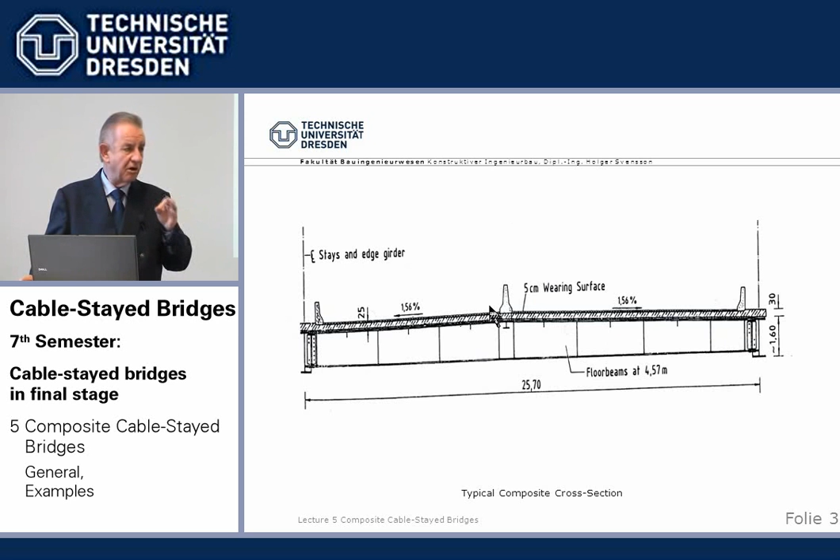It's also clear that it is unreasonable to use a central cable plane for an orthotropic deck, as we had with steel, for example, or all-concrete decks. Sometimes it may be advantageous, but in this case we have negative bending moments as two cantilevers, which gives high tension in the roadway slab. That's basically wrong - we never use one central cable plane with orthotropic decks, only two outer cable planes.

We look into the overall beam. A very efficient cross-section is a steel girder grid with main girders at the outside and cross girders in between. We connect the stay cables directly to the main or longitudinal girders - that's where the force has to go, the shear has to go into the webs. Don't try to anchor it elsewhere and then have to transfer it again; direct transfer of forces. Then we cover the steel girder grid with a concrete roadway slab that can either be cast in place or precast.

Now, precast slabs, as I've outlined here, which will be placed here, have the advantage that when they are being installed, they have an age of maybe one year. They are cast on site before. That means they have strongly reduced shrinkage and creep characteristics, which is advantageous, and it can mean fast or rapid progress on site.

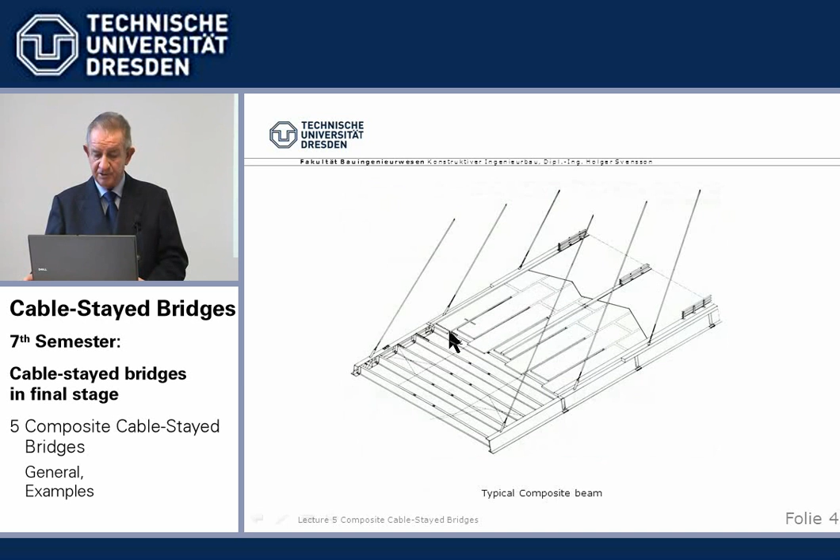Their shortcoming is that, of course, we do have joints. We place the slabs here, then we have longitudinal joints, transverse joints, and in addition, we have to place shear studs on top of the cross girders to get the rigid connection between the steel grid and the concrete slab. So these shear studs protrude into pockets, which we have here, and all this has to be closed by cast-in-place concrete with overlapping reinforcement in the joints.

Such joints are always, in general, weak spots in a roadway slab. We'd rather try to avoid them. However, here we can do it because the joints are longitudinally and transversely permanently under compression, contrary to other structures. So it can be very advantageous to use precast slabs.

The other possibility, of course, is to use cast-in-place deck. We will see examples for that as well. There we have the disadvantage that we have to install forms, shuttering between the cross girders, cast in place, and it takes longer and has more shrinkage and creep. So it's a trade-off.

Both methods, precast or cast in place, are possible. They have their pros and cons. Normally the contractor decides what, for him, with his equipment and his experience, is the most economical.

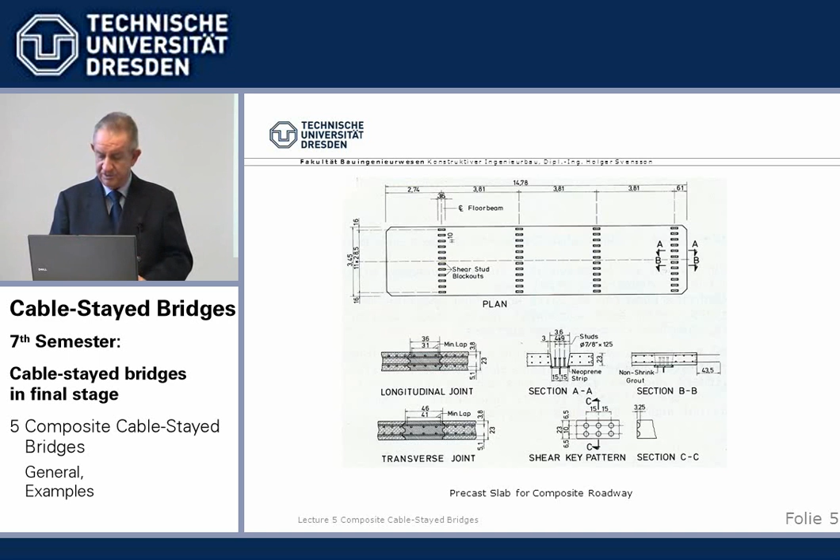Just to make it complete, there are additional composite features in addition to the roadway slab in concrete and steel girder grid. There are examples where we have a concrete beam with steel cross girders in between. This was used for weight purposes. We needed to bring the weight down for the East Huntington Bridge. We'll show that example later. So that's a partial composite solution.

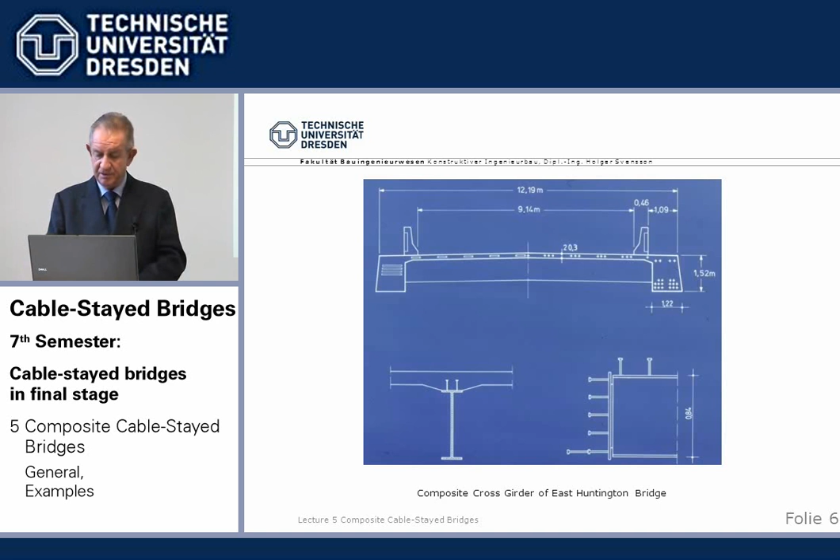And in addition, we can use a composite solution for stiffening orthotropic decks. It's called, today, there's a development in Germany also, and we call it orthocomposite. Now there are two advantages. First of all, asphaltic concrete sometimes doesn't stick so well to the steel—there's delamination, and you have to repair it all the time. Now here, if we put a concrete layer on, we can use some shear studs and get a really good connection.

Furthermore, on an orthotropic deck, when the temperature drops, slippery ice forms earlier, faster than on a concrete deck, which takes longer to cool down when the temperature goes down. In addition, we can use the concrete to stiffen the orthotropic deck itself, which means we may be able to increase the distance, normally 300 millimeters, to say 400 millimeters, as was done for the Zárate-Brazo Largo bridges. And instead of using a 12 or 14 millimeter thick top steel plate, we may reduce that to maybe 10 millimeters.

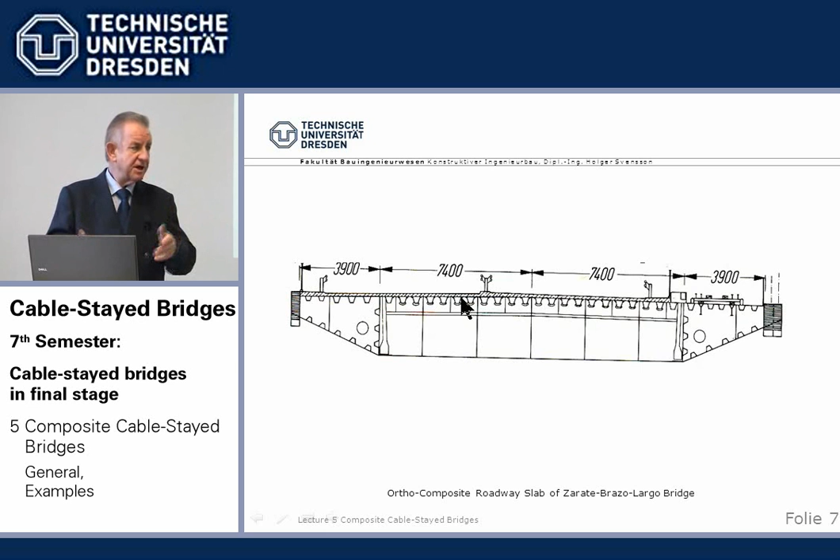Now, when we have these three types of cable-stayed bridge beams—steel, concrete, composite—when do we use what? Meaning, where is the economical range for these different types? Many years ago I made this curve with an engineer of mine, and we tried to fiddle around with unit prices. It can only give an indication, but very generally, lower spans up to something like 400 meters are very often economical in concrete. Medium spans, 400 to 600, 700 meters, may often be economical as a composite beam. And long spans, say above 700 meters, are still the domain of steel.

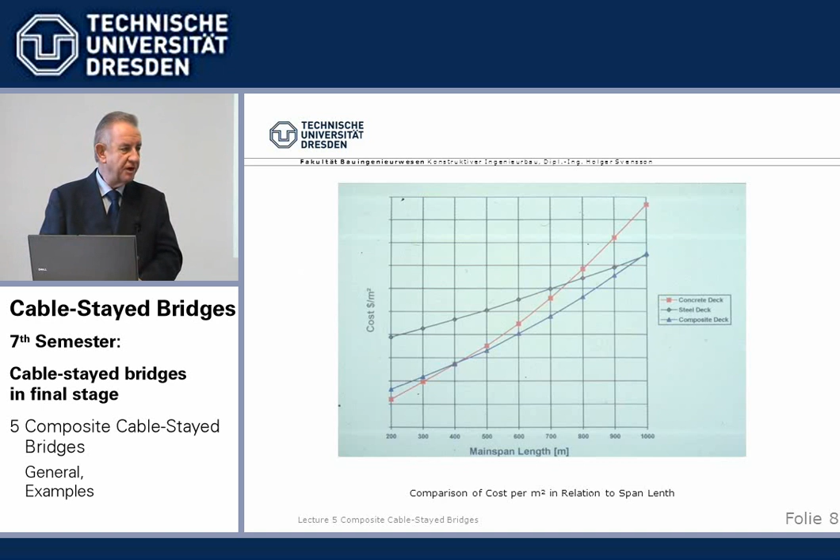One cannot really say that's always the case—it depends on the country. Norway builds concrete with 530 meter long spans because it's a concrete country. In the US, steel composite will start much earlier. But roughly speaking: up to 400 meters concrete, 400 to 700 meters composite, and above that, steel—very general. That's what you can read out of this simple curve.

Now, having discussed the basics and the basic idea of composite, we now show examples.

Just as we mentioned spans, where do we stay? It started with a very small bridge, just for curiosity, because the bridge was in Germany. But then, in earnest, we started around 1970 with something like 450 meters. And the world record still is 602, Yangpu. So what I told you, above 400 to 700 shows in the record spans.

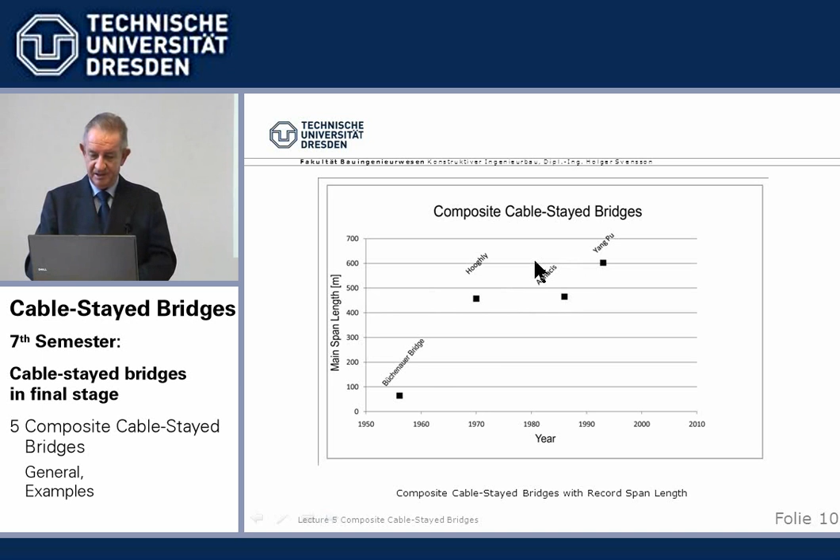The very first one, normally overlooked, a small bridge near Karlsruhe, Büchenau, across the railway, completed already in 1956. Very ingenious. They had the beam built too high against the final state, installed the cable slack, and lowered the beam down to a predetermined level, and by that lowering down they stressed the cables. And it worked. Homberg was the checking engineer and was the idea behind it, but that was more or less forgotten. It was a unique bridge.

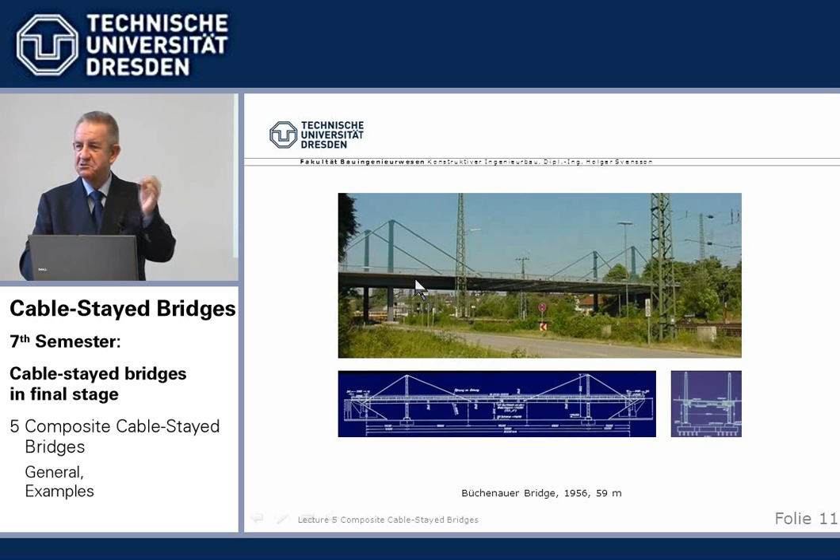People didn't take it up until the early 70s in India, in Calcutta, where a second bridge had to be built across the Hooghly, a tributary of the Ganges River. There's one Hooghly river bridge, a steel truss from Freeman Fox, built before 1900, and that's overloaded. A next bridge was required, and there was a long engineer selection process until finally my company, in the late 60s, before my time, got the job.

And finally what came out was a world record during the design stage, a 457 meter main span bridge, 1,500 feet. Of course, at that time it was all in feet and inches, so the span was 1,500 feet. We can remember that very well. And if we translate that, it's 457 meters.

The design condition was to use only local material in India and labor intensive methods, because we wanted to employ our Indian workers as much as possible. So, use Indian steel — at that time Rourkela was the steelworks in India, and the steel they produced was not weldable. So, no orthotropic deck, which was unusual at that time. What could you do? You use a concrete deck.

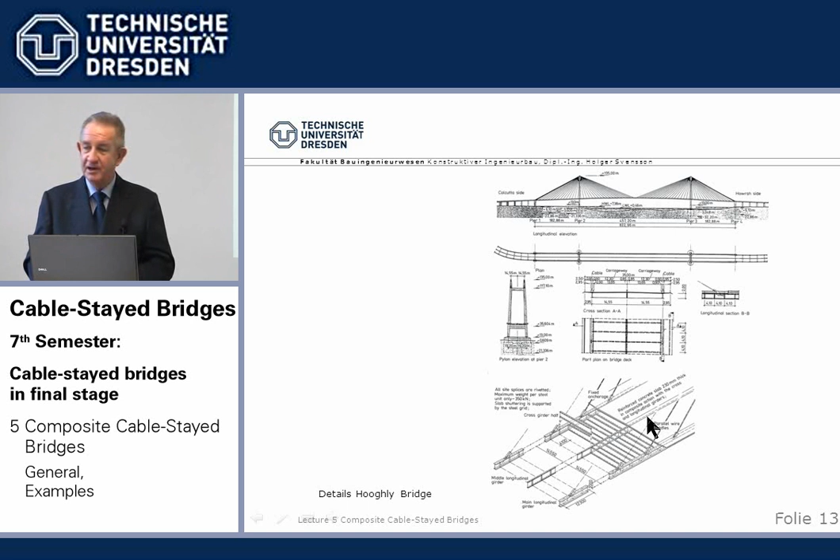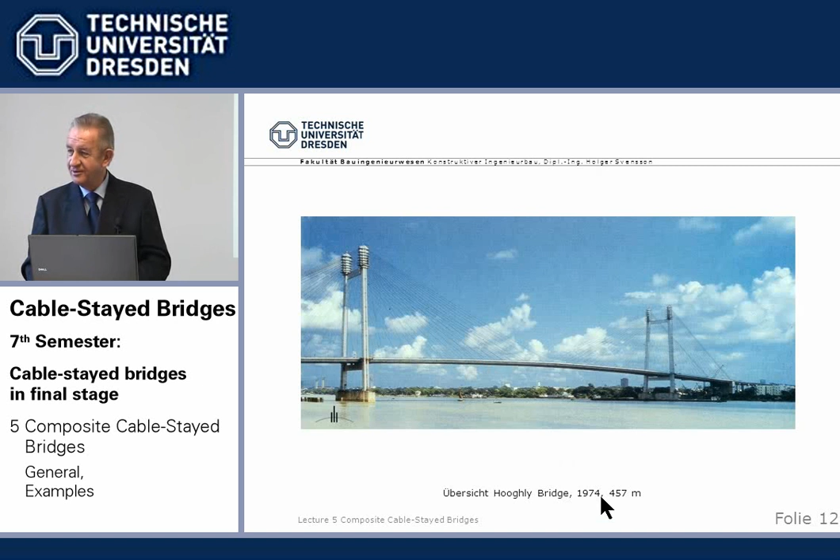Professor Jörg Schlaich, you may have heard of him, was in charge. At that time he was still a partner in my company, Leonhardt, Andrä and Partners, when I started there in the early 70s. I was for some time nominated as resident engineer in India, but then I had to go to the US, and my wife wasn't so unhappy about that — we had a newborn child, and she wasn't too keen to go to Calcutta with a newborn child. Anyway, his able assistant, Rudolf Bergermann, supervising engineer at that time — they were the two who designed the bridge.

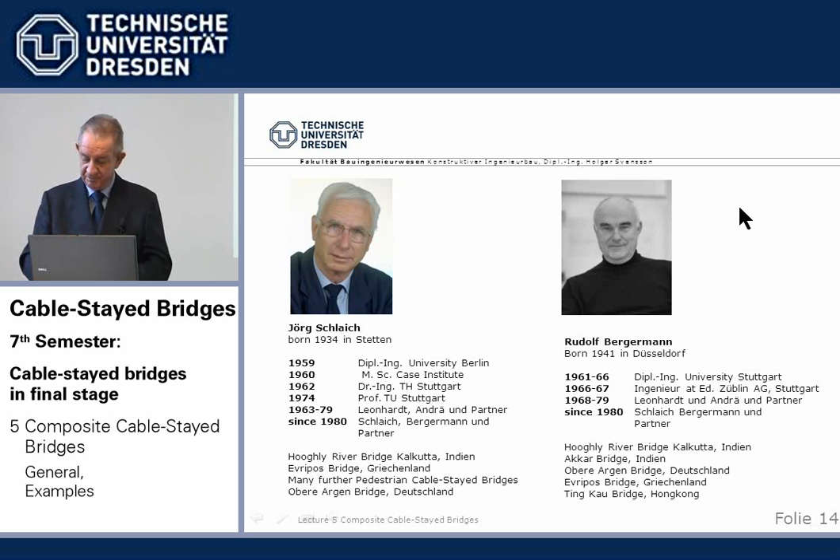I think in 1980, the Sunshine Skyway Bridge in Tampa, Florida, was hit by a ship, fell into the water, 35 people dead. So it was required very quickly to build a new bridge. We will see that in ship collision.

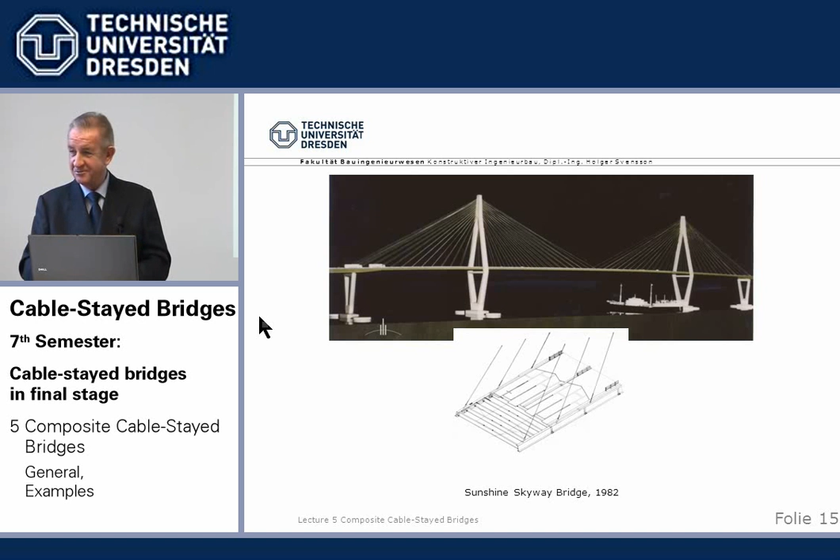I'll show a picture. We designed this as a fairly new design along some lines of the Hooghly bridge, and some new ones. But we lost it in the US, in competition against Jean Muller, with another concrete cable-stayed bridge, because — I keep saying — of some bad foundation design in the approaches, which we didn't do. It was a very nice design, and it still hurts that I spent two years in the US and we were not successful.

The next bridge which took up these design ideas we had developed for the Sunshine Skyway Bridge — just briefly a remark. In Germany at that time, the codes required a limitation of tensile stresses in the concrete roadway slab under service load. That would have meant post-tensioning the concrete roadway slab in Germany, which is uneconomic, as I told you before. And that's why there were no composite cable-stayed bridges in Germany until recently. But in the US, we said, what the hell.

The American codes didn't know about these finer points we were considering here. So we said, okay, we use a lot of finely spaced reinforcement for crack control and have safety in the ultimate state. And so we could design this bridge, which would not have been possible at that time in Germany.

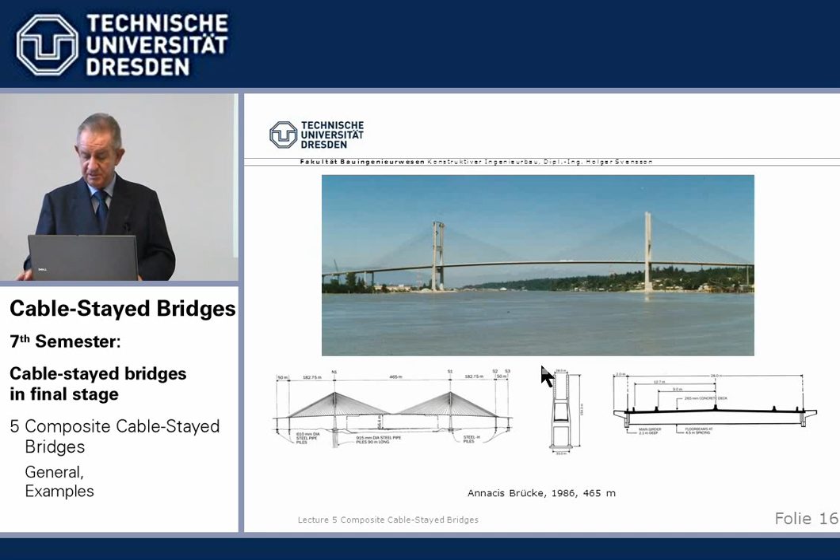Now it is. The German codes have changed. There are no stress limitations under service load anymore, so we can do that. Anyway, these considerations were taken up for a bridge in Canada, Annacis Bridge across the Fraser River near Vancouver, British Columbia, with a main span of 465, same design as our Sunshine Skyway basically. They had just one additional idea, which isn't bad. Instead of connecting the cables to the side of the webs, they built a web extension and anchored the stay cables even more directly to the web.

The problem, of course, is this joint. You must not weld this extension on top of the top flange, because then you get through-thickness tensile stress, and you get what we call in English lamellar tearing - you may get horizontal cracks, Lamellenbrüche heißt das in Deutsch. So you must not pull transversely on a plate, but you can cut a pocket into the plate and then have a butt weld here, which has the same strength as the structure itself, and the plate then protrudes through here. That was a neat idea.

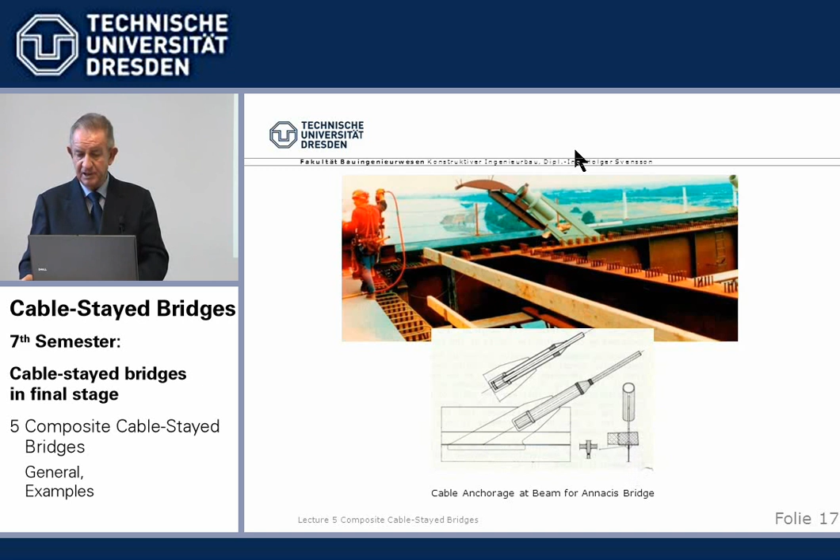Two engineers, friends of mine, Peter Buckland and Peter Taylor, both of British origin, went to Canada and did all the major bridges in Canada they have been doing. We've worked with them on several.

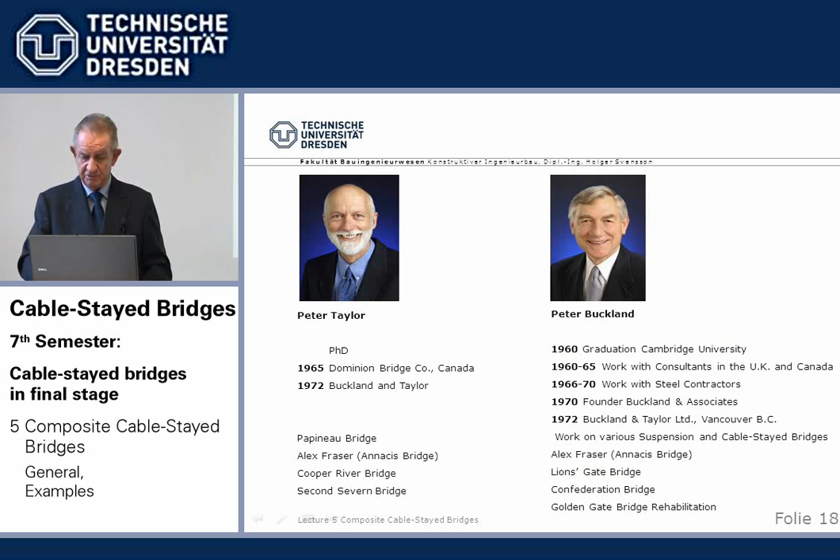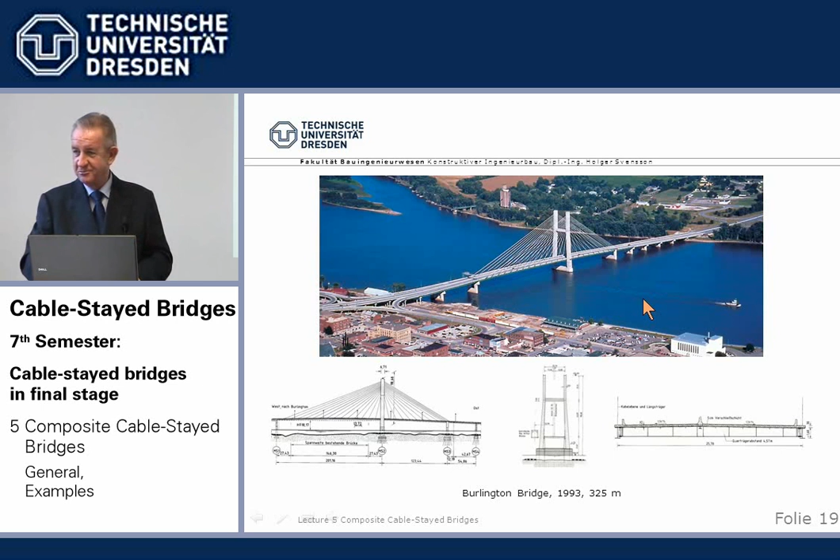Now, in between, we had to design a bridge across the Mississippi at Burlington. Nothing spectacular, but you may remember, since I worked for 15 years in the US, between 70 and 85, there was always a competition - a concrete design and a steel design given to different designers, and the alternate which was bid low was built. So we didn't get Sunshine Skyway. But here, both alternates were given to our designers, so that was very nice - whoever won, it was our design. In this case, it was composite, but they normally didn't do that.

Now, the next record, and still in existence, is the Yangpu Bridge in Shanghai in 1993 with 602 meters. In general, a conventional design. I was involved because China wanted to borrow about 100 million US or so from the World Bank, and the World Bank said, yeah, we'll check it before we give you the money. So there was an international checking panel with the top American, top Japanese, and myself as engineers, and we checked it all, and it was all okay.

As well the design as the construction, we looked - they did it in two places. It was all very nice, and I had to give a TV interview after signing this loan, and I was asked, what do you say about the design? Well, I say it's all very nicely done, but I say that with, as we have a German saying, a laughing and a crying eye. Laughing, because as a checker you are happy if everything is fine and you don't have to tell them they have to do it all again. Now, the crying was, I realized immediately that the Chinese are good enough to design all their bridges themselves. So for me, as member of Leonhardt Andrä and Partners, a German consultant who likes to do work overseas, no more work in China. And that was the case - the Chinese can do it very well themselves.

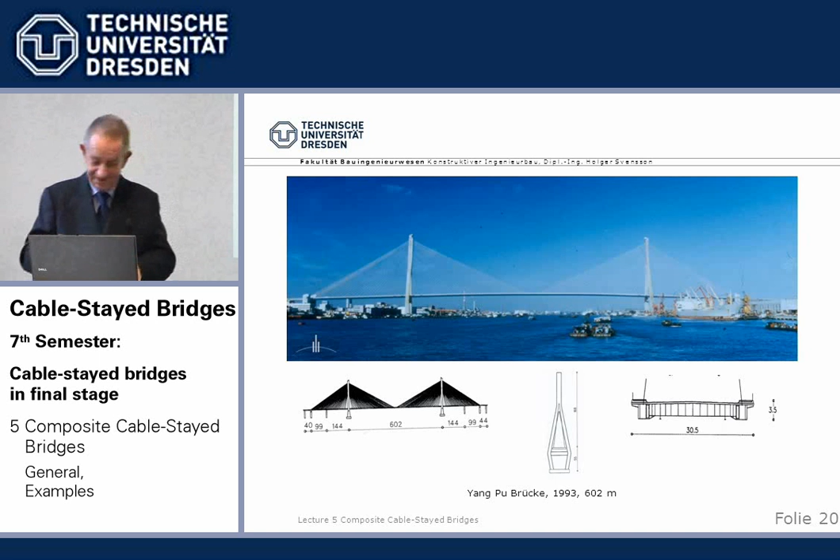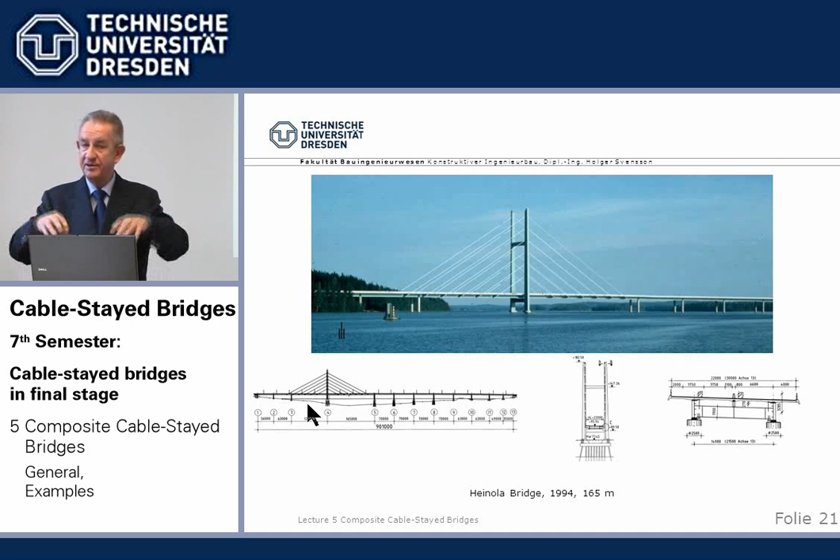Heinola Bridge, we will see again two things. It has a nice harp arrangement, looks nice, and the full length of the bridge was done by incremental launching with auxiliary piers, and then the cables were installed and the auxiliary piers removed. We'll see that again. My friend Esko Järvenpää was the engineer for that. An interesting bridge in Hong Kong is the Kap Shui Mun Bridge.

Hong Kong had an infamous airport, Kai Tak, which was right in the middle of high-rise buildings. When you came into that thing, people were a little bit afraid that the plane would hit a high-rise tower. It was very crowded.

There's not much space in Hong Kong. Kowloon is very crowded. They said, okay, we'll use the island of Lantau, flatten it partly to get the airport, and then go from Kowloon over to Lantau, which is an island in the Bay of Hong Kong.

There's a major suspension bridge, Tsing Ma, done by friends at Mott MacDonald. And we had the other part, the Kap Shui Mun, over the Rambler Channel.

Interesting is that it's a double-deck bridge with 6 lanes of traffic on top, and regularly 2 rapid transit railway lines at the bottom. Plus, if we have one of these typhoons, which appear often in Hong Kong, you cannot use this, cars would be blown away. So we need emergency lanes in case of a typhoon, also for ambulances, police, and things like that, in addition to the railways.

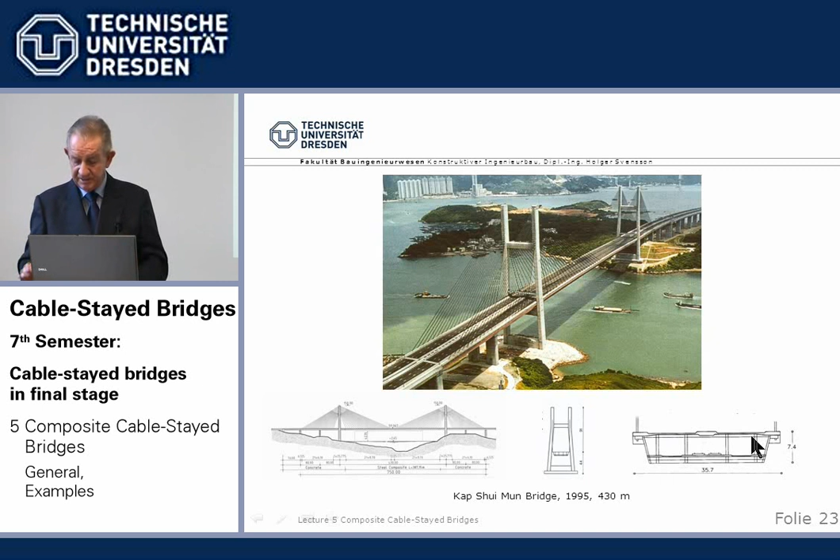This was designed quite uniquely, as a composite structure. We have steel frames, steel webs, and concrete top and bottom slabs.

Since we have the railway here, we always have a depth of something like 8 meters, and close cable spacing, so it was possible to lift complete sections, all the steel, all the concrete in, just straight up with strand lifting equipment. Those weigh in excess of 500 tons. That's a lot to lift, but possible because we have this great depth, 8 meters is possible.

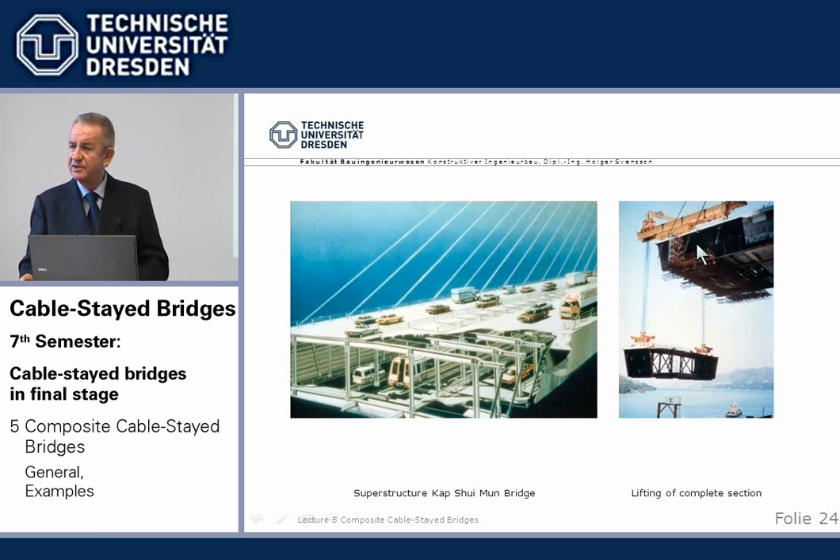An interesting bridge I did was again in the US, in Texas, across the Houston Ship Channel, which goes directly into the Gulf of Mexico, the oil center of the US. All the oil tankers go in and out. There was a tunnel until then, but it was too small and old, so a new connection had to be built, a bridge.

First of all, because of the heavy ship traffic, I think it's 55 meters, 180 feet, something like that. It's all, of course, still today feet and inches in the US, if we calculated PSI instead of Newton per square millimeter, you get used to it. But I make it all metric here.

So 50 meters high, then we needed something like 380 meters also for ship collision clearance. Because everything in Texas is bigger and better, we needed 8 lanes, 4 lanes in each direction with full shoulders on each side. So we had actually 6 lanes going and 6 lanes coming back. That would mean a very wide bridge.

We started out with 2 cable planes, about 50 meters or so wide, 2 cable planes at the outside, and found out that we needed too much steel. We had the composite alternate. Jean Muller had the concrete alternate.

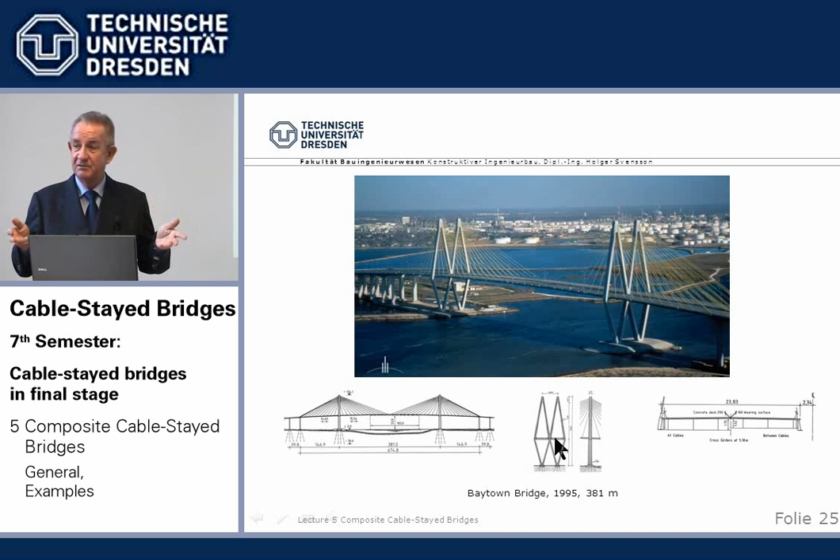And the end of the story, we won. So that's what we wanted, and that's the name of the game. In bridge design, you want to win. It's always competitive designs, one against the other, and the final price counts everywhere in the world.

Okay, another interesting bridge, the Öresund Bridge from Denmark to Sweden. The whole crossing with the Great Belt and so on has a railway, so we didn't do it in detail, but we were involved. They chose a truss with the railway underneath and roadway on top. If you have the railway underneath, it's always better to use a truss than a box, because people in the trains can look out through the truss and get a clear view of the sea, instead of being in a closed box like a tunnel. So even though a truss isn't necessarily less expensive than a box, it's nice to have the railway in a truss to give people the view.

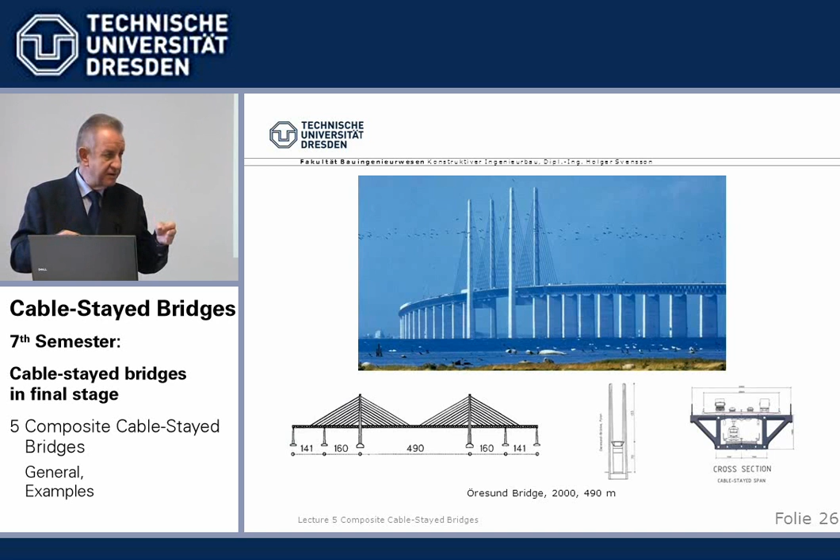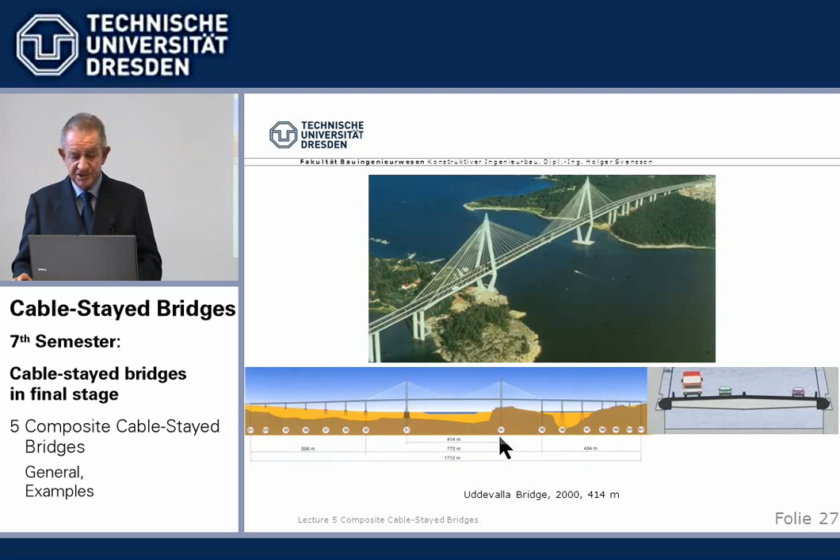Some others: I was checking engineer for a bridge in Uddevalla, Sweden, similar to what you know already. What we did in Sunshine Skyway has been taken over by many, with an open cross-section. We had some ship collision problems there too. Then Kolbäcksbron, also in Sweden, where I was checking engineer, designed by my friend Eljan Jure from Norway.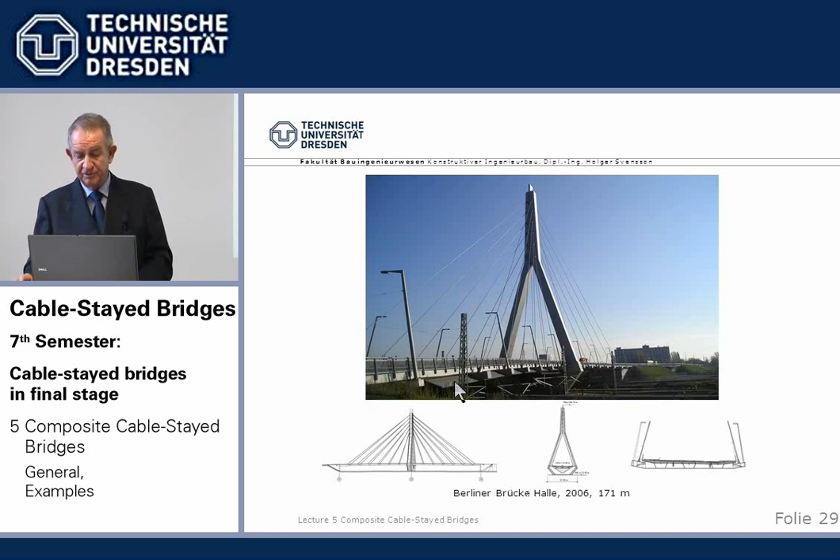It goes over the railway bridge, otherwise it's typical of what we did. And the next one, very close to here, the Niederwartha Bridge, also a nice composite cable-stayed bridge, which is now possible. I think the bridge itself is done, but not in service yet because the approach roads aren't finished. You can see it, it's maybe 10 kilometers from here.

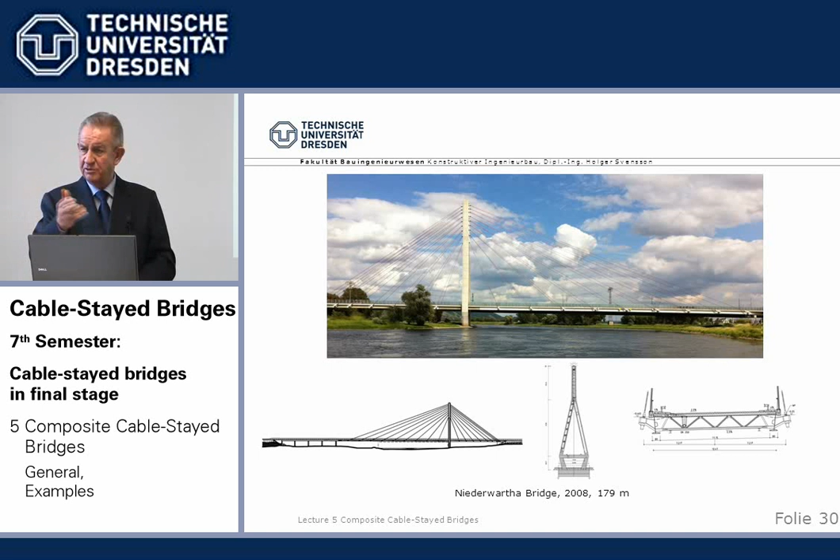Very cleverly, the government said, although we don't have a railway yet coming to the bridge, we designed the bridge to have one. So later on, once the railway is built, the bridge is ready. That's why all these Orinoco bridges have, in this case, only one railway track, although there will be more, but not today—later on.

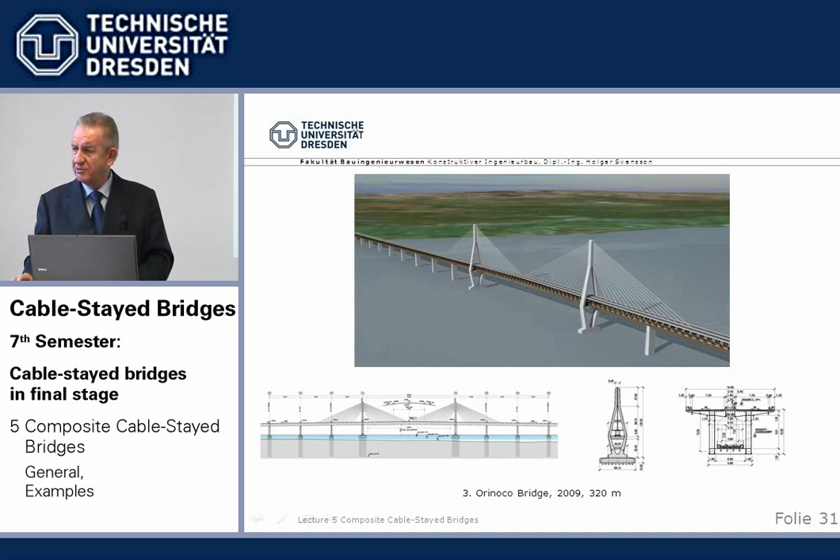Again, these are very long bridges, with 10 to 12 meter differences in water level, meaning the railway needs 10 to 12 kilometer long approaches so it doesn't get wet feet at high water. Long spans, very bad soil conditions, so the cross-section from the approaches governs the bridge design, and that was carried over through the cable stay. It works well.

So, this should give you an overview of composite cable-stay bridges. They advantageously combine the advantages of concrete and steel: concrete on top for local wheel load distribution plus carrying a large part of the compression force, and steel underneath for ease of construction—we'll see that later in special lectures—and also for taking the mostly positive bending moments from live load, which gives tension at the bottom, where steel is very good in tension, while concrete is good in compression. That's why this combination is, for suitable situations, a very economic solution.

And as I pointed out again today, in real life, competition is the name of the game. It's always a competition, and we want to win. So we have to find the most economic design, which is as good and stands up as long as other designs, which apparently are more expensive. Okay, thank you.